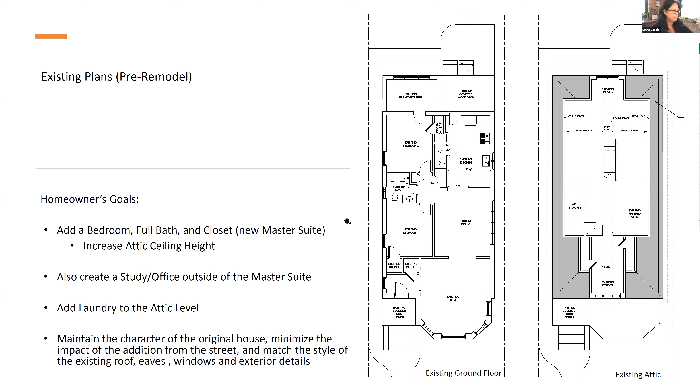So here we have a view of the attic as it was before we started the project. You can see that the existing ceiling was quite low—from the floor to this flat part of the ceiling was only 7 feet, just a hair over 7 feet. Obviously the ceiling sloped down on either side, following the line of the roof, and once you get to the sides of the house, there's really not usable space; it's a very low ceiling height. So part of this project was looking at ways to increase the ceiling height to make this habitable space.

Now, on some projects we're starting with a ceiling height that's a little bit higher, and it's possible to look at ways to simply dormer or raise the slope of the roof to gain height on the sides of the house, so that you can make it usable without raising the ridge—the highest point of the roof—higher than the existing roof.

In this house, I knew from the start that we wouldn't really be able to do that because their existing height was so low. So we knew that this project would include raising at least a portion of the existing roof higher to have enough height to create this addition.

Another thing I wanted to point out is that in this picture on the right side of the plan, the homeowners had previously installed a SpacePak air conditioning system. SpacePak is a high velocity mini duct air conditioning system commonly installed in existing houses. The ducts are small, so it's easy to sneak them in and around existing conditions and structure in the house. Their equipment for this system is in this room here at the back of the existing attic.

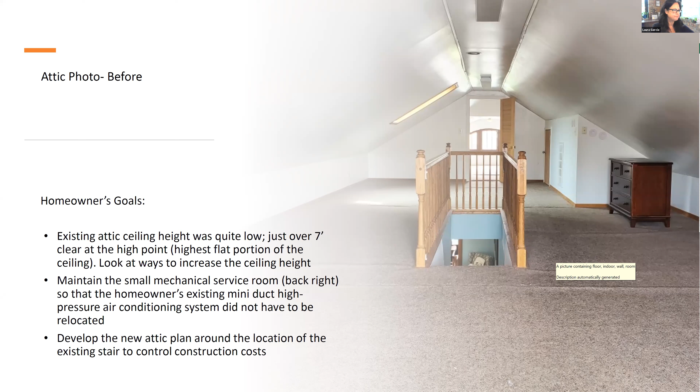So now I want to talk a little bit about the design process, which for me is a collaborative process with the homeowners. So after we talk about the goals, what they want to add to the attic, I come up with some options for how to accomplish this.

In their case, we're looking at options in plan and exterior views of the house and elevation because it involves raising a portion of the roof. These are two early options that we looked at and ultimately rejected. We didn't move forward with either one of these, but I want to talk about them briefly just to give you some insight into the design process.

In this option, to start, both of these additions—this area is the addition, and in this other option, all the way to the back of the house is the addition. Both of these additions are pulled back 20 feet minimum from the front of the house. This is really important because it minimizes the view of the addition from the street. When you pull the addition way back, you can't see it from the street, and it helps maintain the original character of the bungalow.

So all of the options show the addition oriented at the back of the house. And then from there, all of the options show a bedroom that overlooks the backyard to utilize those views, and a bathroom located over the existing bathroom on the ground floor. That's so we have plumbing close to plumbing that's already in the house, making it easier to pull that plumbing up to the second floor, to the attic.

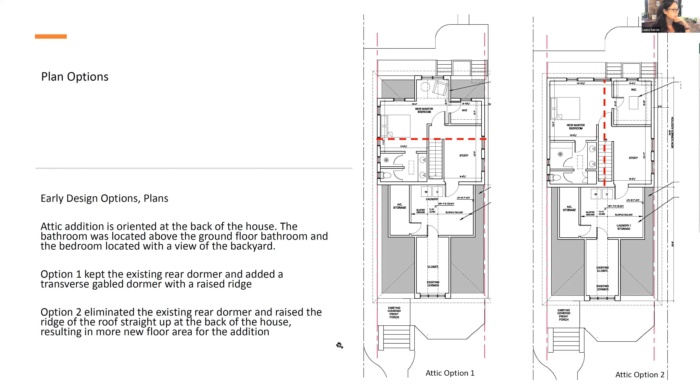So now these are exterior views of the house. We call them elevations. Down here at the bottom, these are the existing elevations, meaning the views of the house as it was before any addition is added. And then we have option 1, which I was just talking about on the last screen, and option 2, what they would look like from the outside.

So up here in option 1, we have the front of the house. Remember that the addition is way back 20 feet, so if you're actually standing on the ground here looking up at the house, you really wouldn't see it. But the way we draw it, it looks a little bit different. Just wanted to clarify that. But this is the front, this is the back of the house. And then this is a piece of the side of the house, the rear of the house, so that you can see what it looks like from the side.

So you can see in both of these options that the addition is really quite bulky and looks quite tall and blocky. Like in this addition where the roof is rotated 90 degrees, it really adds a lot of height to the side of the house in particular, and it's very blocky. And likewise, in this addition, the rear wall of the house here is just a massively tall wall. And then we have a long roof line here that really makes both of these options look pretty bulky and overwhelm the existing house, despite the fact that the addition is pulled back from the street.

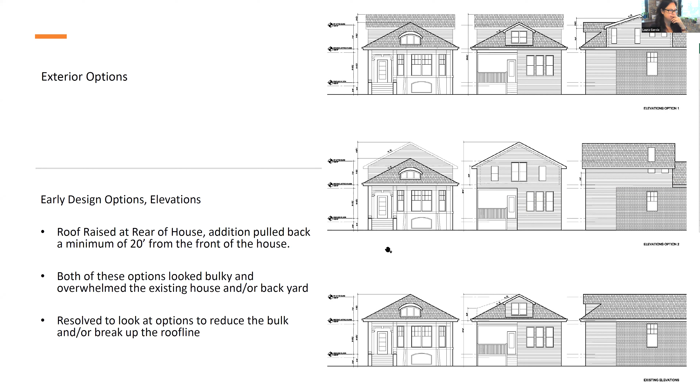So now here we are looking at the plans that we landed on, the final plans for this project. As you can see, looking at the attic plan, it looks pretty much the same as in some of the earlier options. We have the master bath with a full walk-in large shower, a double vanity, a separate toilet room, and a linen closet. We have a master bedroom here overlooking the backyard, a large walk-in closet, and a large study area with the stair wall being a partial height wall so you can stand and look over the edge down the stair to the ground floor. And then this front area of the house, the first 20 plus feet of the house, remains unchanged. But then the change here is the roof plan.

So now, instead of it being a gable roof, it's a roof that slopes in four directions. It's now a hip roof like the existing house's roof. A hip roof slopes in four directions, so it slopes down in all four cardinal directions. So now we have a top of the roof, and the high point of the roof is actually minimized, and you'll see this in a second in elevation. Then in addition to changing it to a hip roof, we added 3 secondary dormers at key locations in the plan to add additional height so that we could reduce the overall height of the addition.

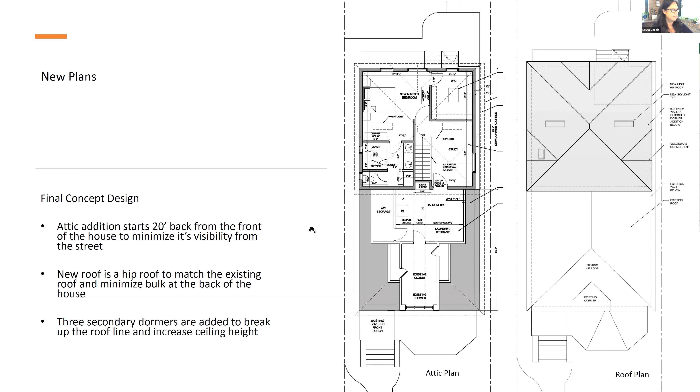So looking at that in exterior views, elevations again, this is the existing house for reference, what it looked like before the addition. And now these are the elevations of the new house, so that you can see now that in all four directions that you're looking at this addition, the roof slopes down. That really helps to minimize the bulk of the addition.

And then you can see these secondary dormers. Here's one at the back of the house off of the master bedroom. There's another secondary dormer here at the master bath at the side of the house. And there's the third secondary dormer here at the study. So these secondary dormers serve to give us a little bit of additional height at key locations in the plan. They also serve to break up this long roof line and minimize both the bulk of the addition and add some character to the roof lines.

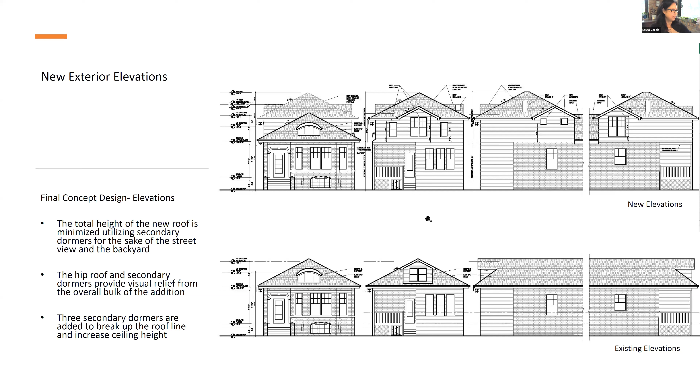To talk a little more about this addition, we have a section view. A section is like slicing a building vertically right down the center and opening it up to look at it like a dollhouse, that's a building section. So that's what we're looking at here, a vertical section through the house.

You see the stairs going up to the attic. This is the attic level. These dashed lines are the lines of the old attic roof, or the roof beyond this addition that's remaining, that we're not altering. And this is the plane of the new roof cut through two of the secondary dormers, so you can see that.

The amount that the new roof is raised over the addition is about 3 foot 3 inches. It's really not a whole lot, just over the addition we're raising the roof a little over 3 feet. By doing that, we end up with a full 10 feet 6 inches of clear height up to the high point of the ceiling.

The ceiling slopes down following the roof joists until we get to the secondary dormers, which give us 8 feet 9 inches, just a little under 9 feet, of height to the high point of the secondary dormers. Then where the roof hits the new wall, where there are no dormers, we have 6 feet of height.

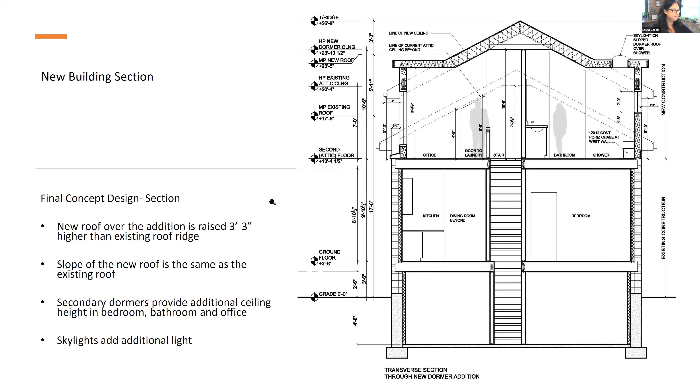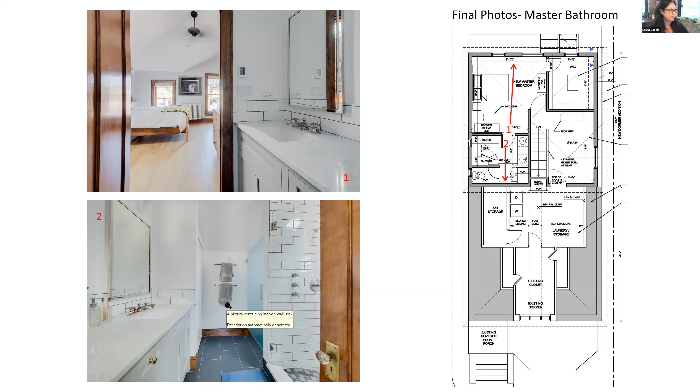Here on the left is a view of the shower that is strategically located under one of those secondary dormers, so we get the cool pitched ceiling at the shower.

The laundry we located in the part of the attic whose roof we did not modify. The laundry room is not really space that theoretically you're going to spend a lot of time in, so this seemed like the perfect place to put it. It's a really nice sized laundry room, and it doesn't need all the ceiling height of the rest of the addition, so it worked really well to locate the washer and dryer here.

And again, just to reference one of my earlier slides, we were able to maintain this room that existed before for the homeowner's existing air conditioning system, so that we didn't have to move that for this project.

Now I want to take a minute and talk about sustainability, green technology, energy efficiency. As background, buildings account for 40% of all our energy use in this country, which is an astoundingly large percentage when you think about all the energy we use for so many different things.

So the building industry is working on reducing our collective dependence on fossil fuels and mitigating climate change by incorporating green technologies into buildings. We're doing that in a few ways: using on-site renewable power sources, like solar panels on the roof or wind turbines; passive design techniques, like how we orient buildings on a site relative to the sun, passive ventilation techniques; and incorporating energy efficient fixtures and equipment.

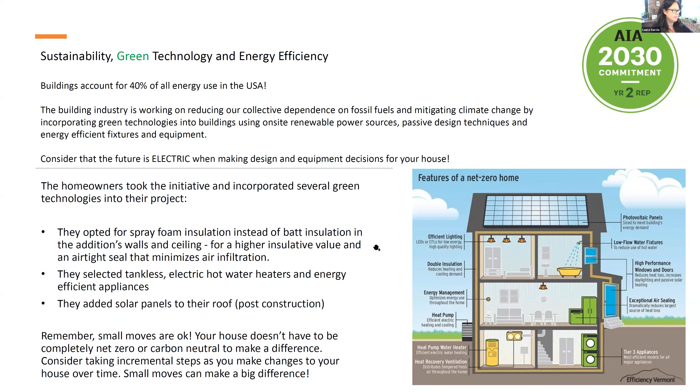Okay, now let me see—time check, 6:30. We're doing pretty well, good.

I want to address some typical issues we often see when remodeling or adding onto bungalow attics. The first one is that existing attic floor joists are often structurally inadequate. What that means is that these bungalows, when originally built, had attics designed as just raw space—they weren't built with the intention of eventually becoming finished or habitable.

So the structural floor joists of the attic are typically undersized. They don't have the load capacity needed to support fully habitable space with people and furniture. And so the vast majority of the time, we have to look at ways to shore up or increase the structural load capacity of the floor joists.

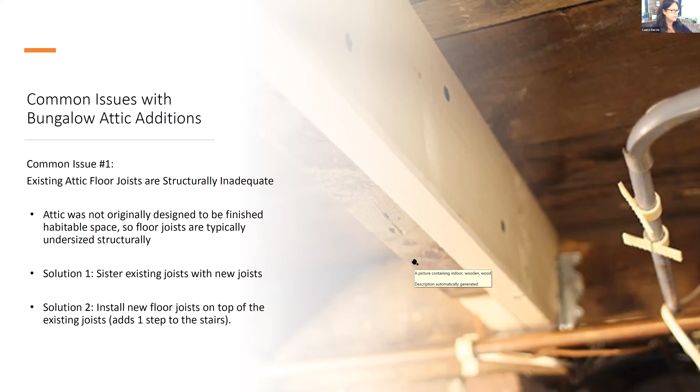Okay, next common issue that we often see: zoning setback requirements. The zoning ordinance is a separate standalone ordinance, separate from the building code, that has a whole series of requirements that projects need to comply with.

To back up for a minute, we live in a city where we have a lot of buildings that were built before the current zoning ordinance was enacted. So what this means is that we have tons of buildings that don't actually comply with current zoning requirements. And that's okay. If your current house doesn't comply with zoning requirements for the property, it's okay—you don't have to do anything. That's called existing non-conforming, and your house can stay just as it is without an issue.

In this homeowner's case—and I want to emphasize that this can vary from house to house on the same block—it's really about zoning requirements and setback requirements.

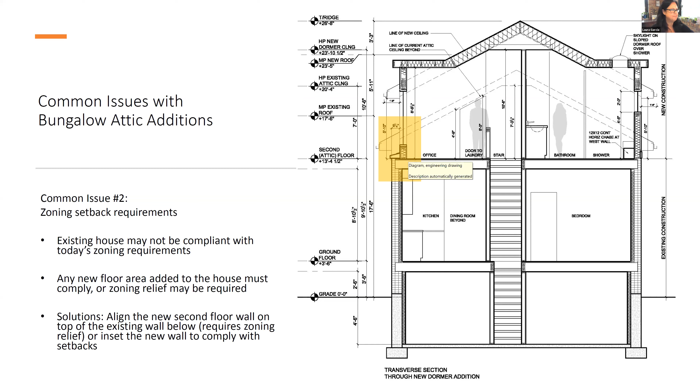The last issue that we often see with these bungalow attic additions is the existing stair up to the attic is often not code compliant. Either it's not wide enough—code requires that residential stairs be at least 3 feet wide—or the rise and run of the stair is too steep. We see both of those conditions, and in this project I'm addressing specifically the issue of the existing stair not being wide enough. Now, if it's like 2 feet 11 3/4 inches or something, we probably wouldn't mess with it. But in this case, we were a good 5 inches off, enough that we really needed to modify that stair to be wide enough to be code compliant.